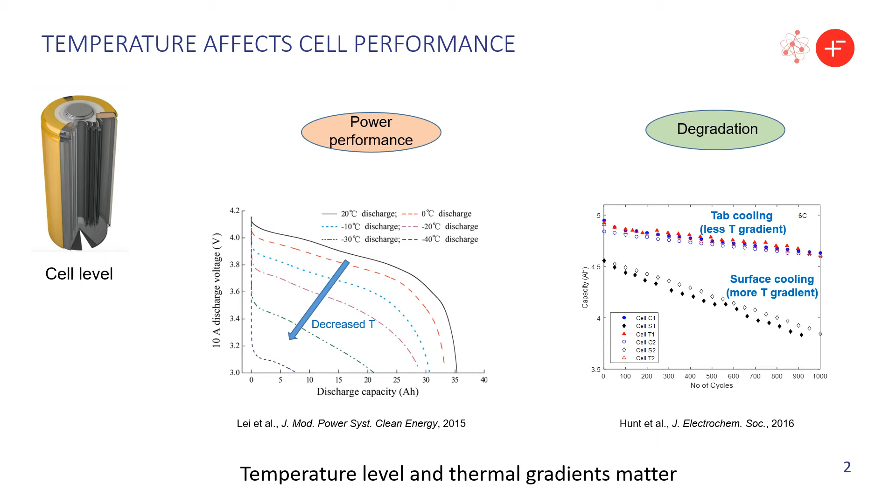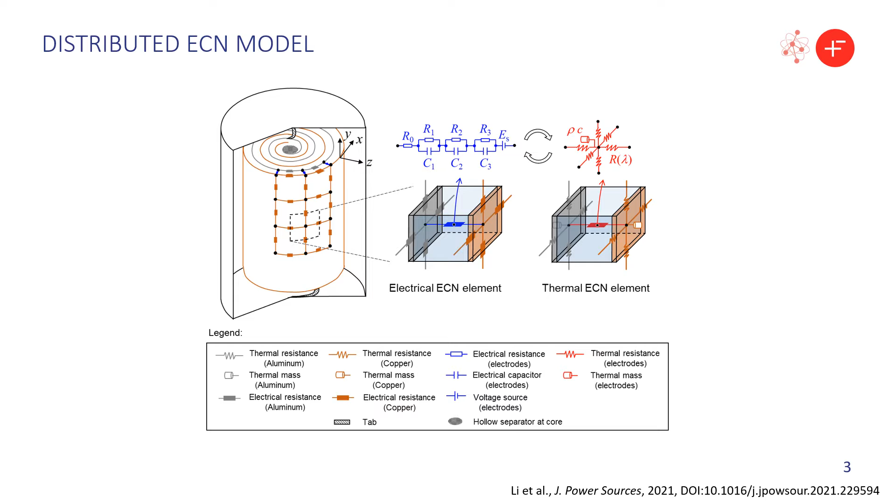To validate the model, an in-cell thermal sensor technique was implemented to detect the internal temperature of the cell. The additional thermocouple was inserted into the core area without causing change to the cell capacity and resistance. With the internal thermocouple instrumented in the LG M50 cell, the heat transfer model was validated at first. In these validation tests, no current was applied.

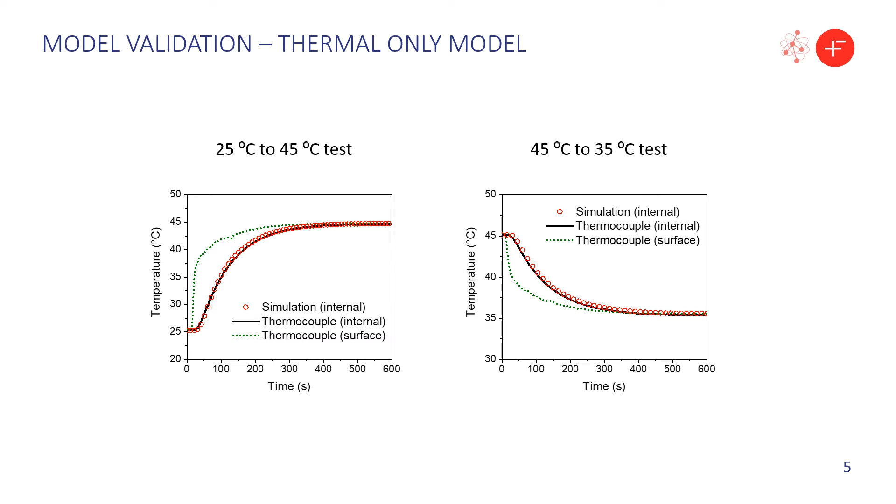The instrumented LG M50 cells were subject to rapid temperature changes from 25 to 45 degrees and from 45 to 35 degrees. The thermal responses of the core area of the cell were monitored. From these plots, we can see the simulation results are in good agreement with experimental results.

Later, the electrothermal model was validated against constant current and pulse discharge tests. Still, the simulation results match the experimental measurement of voltage and core temperature. The performance of the distributed electrical and thermal model was compared with the lumped model case. Here, the lumped model is the simplification of the distributed model with only one electrical and one thermal unit.

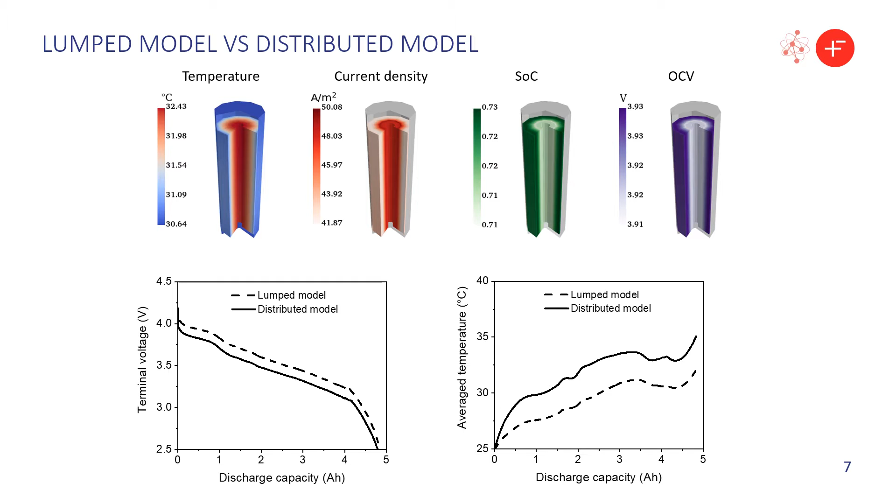Top-base convective cooling minimizes the temperature inhomogeneity, but the temperature rise is high as this is a near adiabatic condition, so the top-base convection cooling scheme should not be preferred.

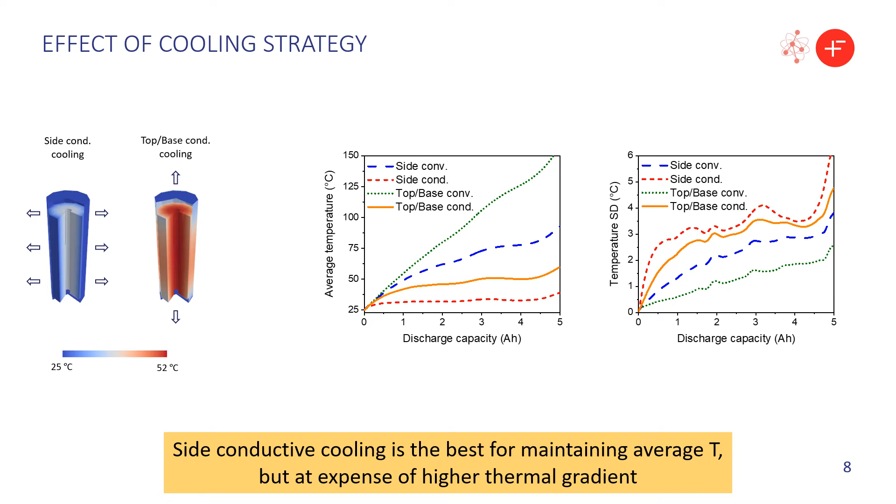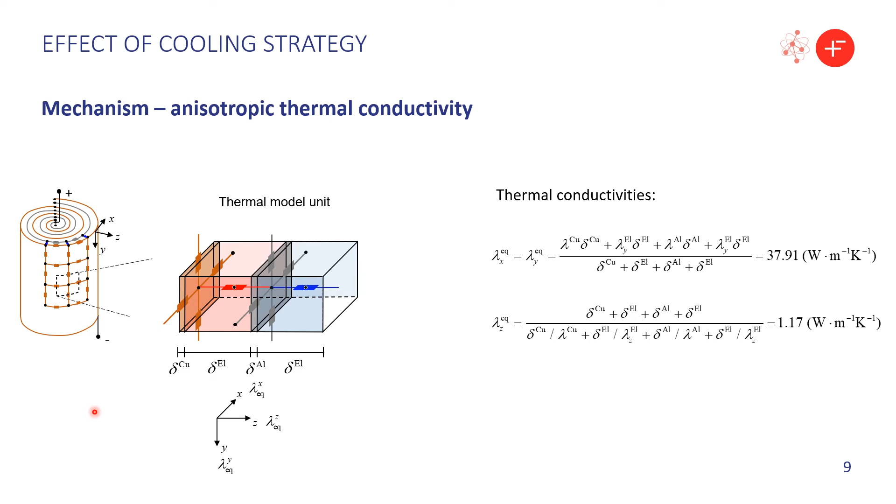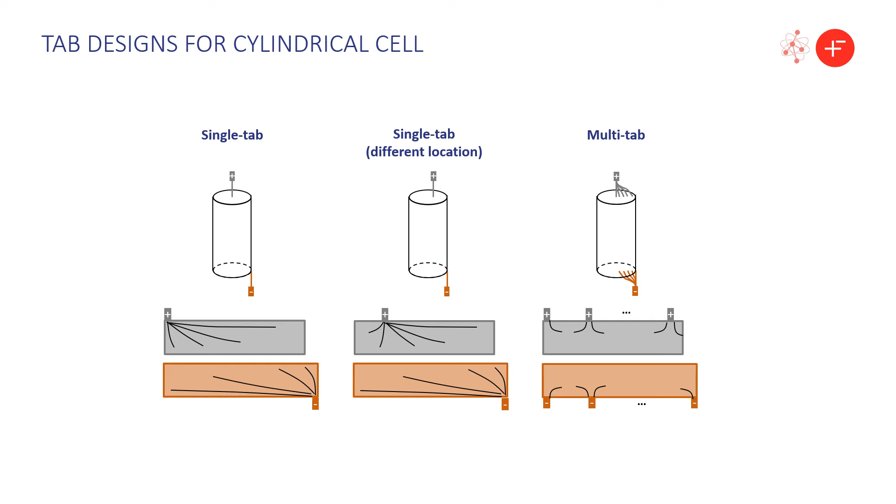Apart from cooling strategy, tab design also affects the temperature distribution as it regulates the current pathway. The tab position can move the hotspot position. The number of tabs can make the heat generation more evenly distributed. Here are the results of the different tab designs under the same thermal boundary condition. The top row shows the temperature distribution at the very start of the discharge. We can see the single-tab design initiates more obvious temperature inhomogeneity than other designs with more tabs.

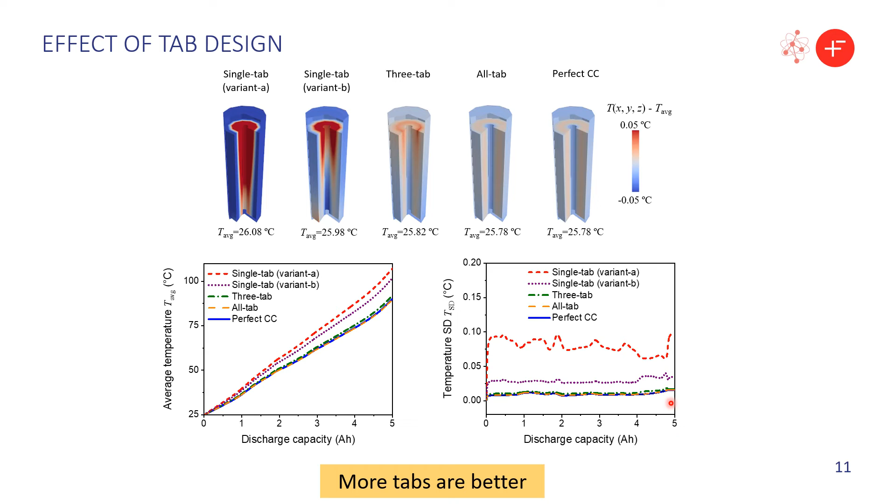The bottom row shows the temperature during the whole discharge process. As we can see, the all-tab design could lower the average temperature by about 20% and can significantly reduce the temperature inhomogeneity as well. When we compare the two tab designs, we can see in the all-tab design, the temperature is more evenly distributed due to the even heat generation that is regulated by the multi-tab.

And there is a positive feedback between temperature and current density. That is to say, where the temperature is high, the current density is large, and in turn, the large current density causes high temperature. Therefore, according to this mechanism, as time evolves, the temperature inhomogeneity in the single-tab design will be magnified.

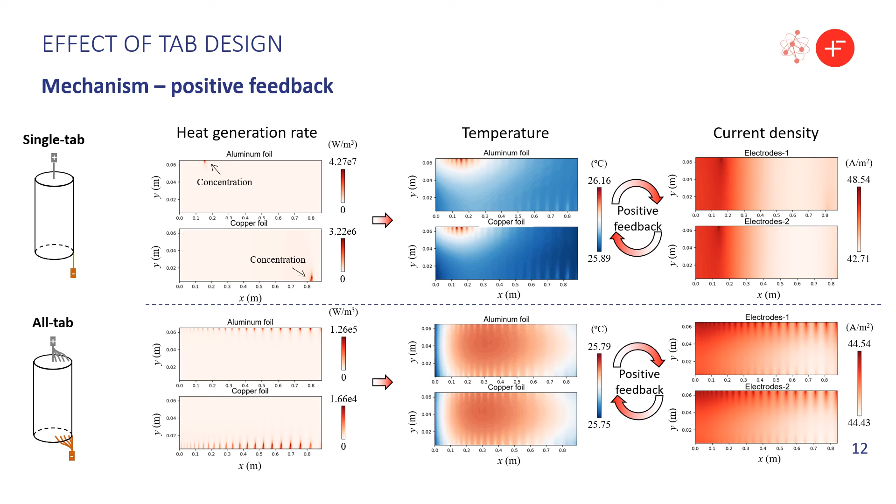In real applications, both factors of cooling strategy and tab design take effect. We define an index to judge the temperature average and temperature inhomogeneity under the combinations of the two factors. In this plot, we want to minimize the index, so the bottom left area is the best location. We can see from this plot that the multi-tab design is always better than its single-tab counterpart. There is a trade-off between choices of lower average temperature and less temperature inhomogeneity.

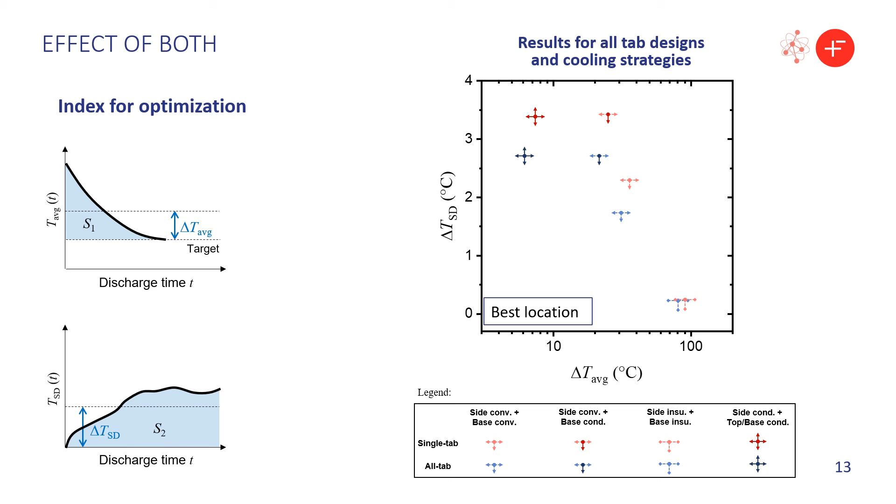The research findings above could lead to the redesign of cells with better performance. Tesla has released a patent of fabricating cells in production. In our model, this is a case of all-tab design. We can see that Tesla's new cell potentially breaks the bottleneck of the trade-off between the choices of common cylindrical cells.

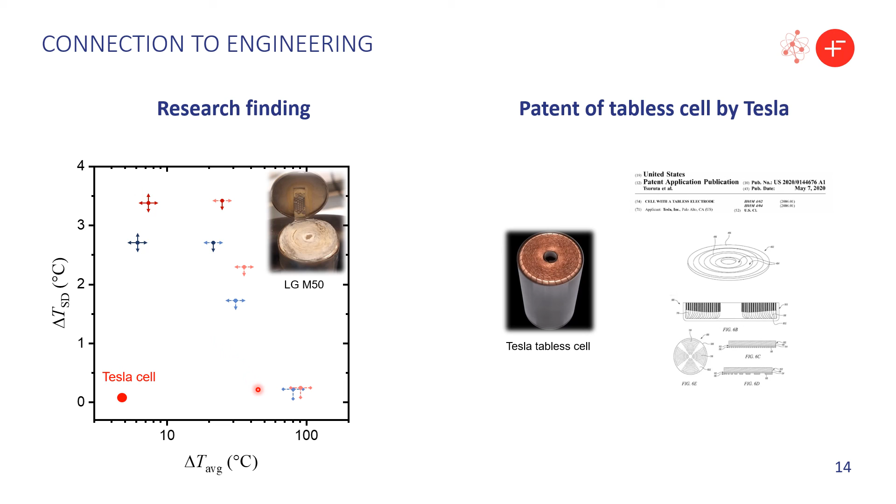In summary, for this work, we developed a distributed cell-level model. Case studies on tab design and cooling strategies were conducted. More tabs and side conductive cooling are preferred for the LG M50 cell used in this study. The results benefit from one of the advantages of this model, that is, to consider the detailed internal structure of the cylindrical cell.